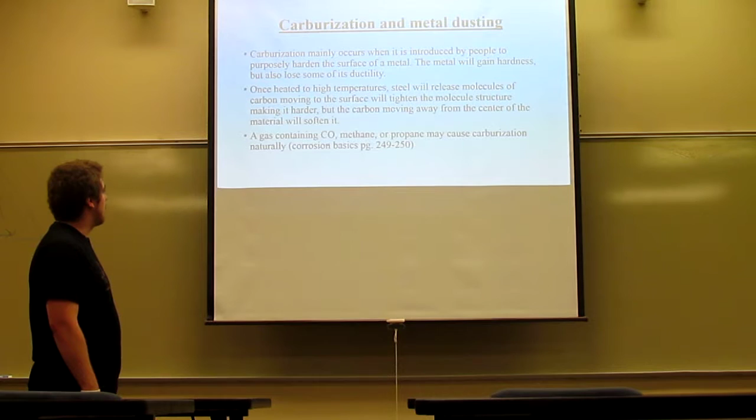Once heated, the steel releases molecules of carbon moving to the surface. Molecules that move to the surface will tighten the actual structure, making it harder, but obviously the more tensile strength that happens, it's going to break. Most metals are susceptible, but some more than others.

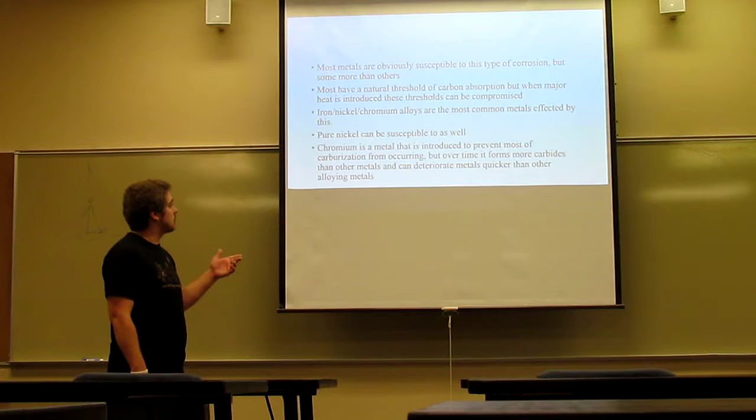So we have metal dusting. The gaseous state of graphite deposits on the surface of the metal, and that creates a graphitic layer. It can carburize in the absence of oxygen. Low alloys vary depending on this, but stronger alloys such as stainless steel can still deteriorate pretty fast.

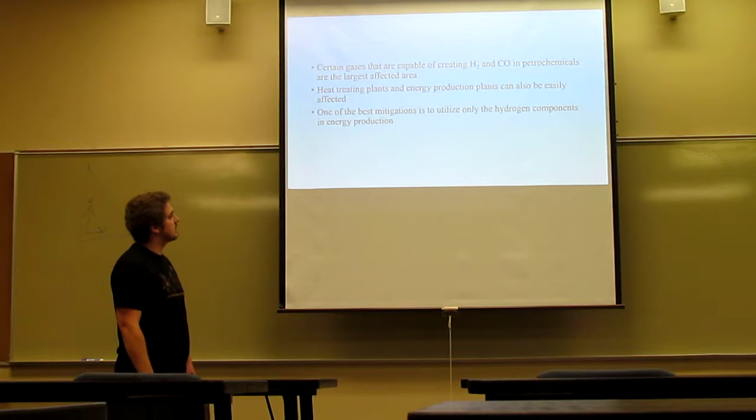The average temperature is about 450 to 800 degrees Celsius for the metal oxide to create pitting or localized corrosion. Certain gases that are capable of creating H2 and carbon monoxide in petrochemicals are the largest affected areas. Heat treating plants and energy production plants can also be affected, hence the high heat.

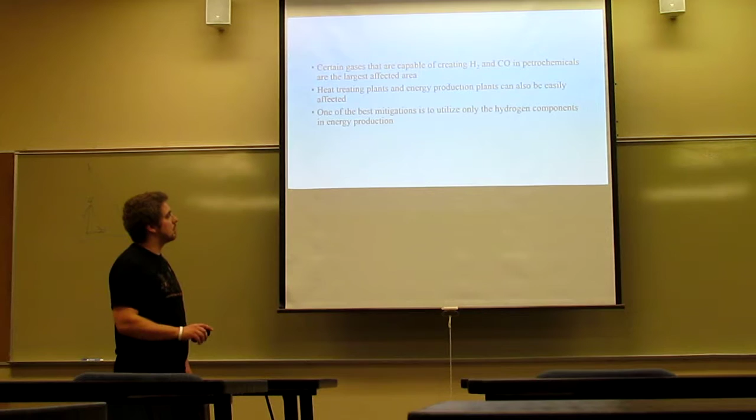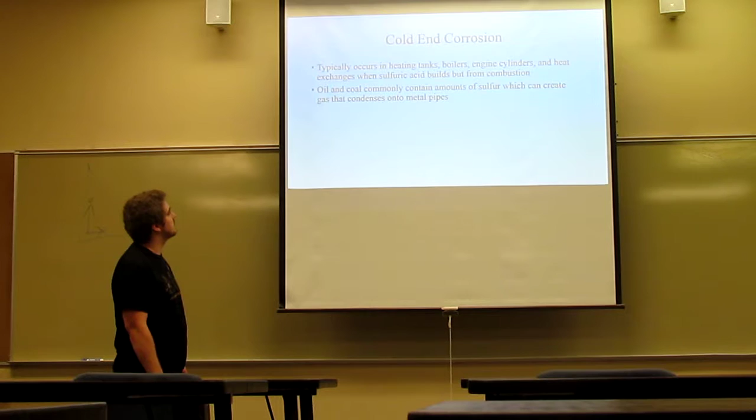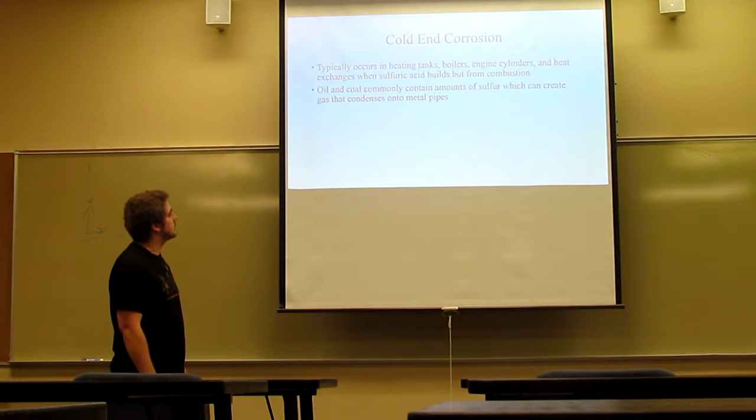My next topic is cold end corrosion. It typically occurs in heating tanks, boilers, engine cylinders, and heat exchangers, where sulfuric acid builds up from combustion. So obviously in gas. When everything is combusted, there's sulfur in the gas, and it ends up building up on surfaces. Oil and coal obviously contain amounts of sulfur.

Any metal that is used in engines and boilers is susceptible to it, so basically anything that runs on gas. Stainless steel is the main type that breaks down, but chromium, nickel, iron, and alloys including these materials will break down just as easily.

A few different types of cold end corrosion mitigation. Low sulfur fuels may be used if available. A lot of companies just don't use low sulfur fuels because it's a little more expensive. Adding magnesium oxide to the fuel may also help mitigate it, and it creates a magnesium sulfate, which is less corrosive.

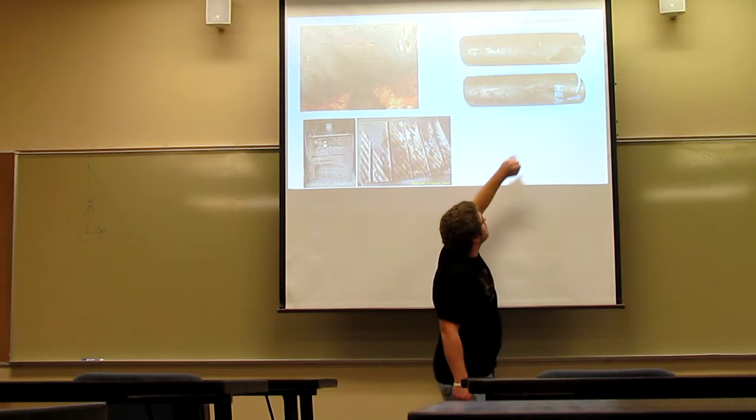Also, higher exit gas temperatures can help, but it's less efficient for the boilers or whatever they're using. So a lot of companies don't end up using that, but that is also a way. And as you can see here, you can see the buildup on the surface. It ends up eating straight away at it, and this picture over here shows that it's eating straight through everything.

Dry corrosion, very interesting type. It takes place without moisture, which usually doesn't happen. Dry corrosion is very slow because, as you know, for corrosion to happen, you need moisture and you need a metal. Obviously, when everything is heated, it's a little more susceptible. And sometimes people refer to it as chemical corrosion.

Typically, corrosion occurs when the metal is in contact with moisture. Gases such as oxygen and liquids come into contact with the surface. The most corrosive material is concentrated oxygen, and when that is not present, corrosion does slow. It's not as detrimental as wet corrosion. And the easiest way to solve this is just to add a coating.

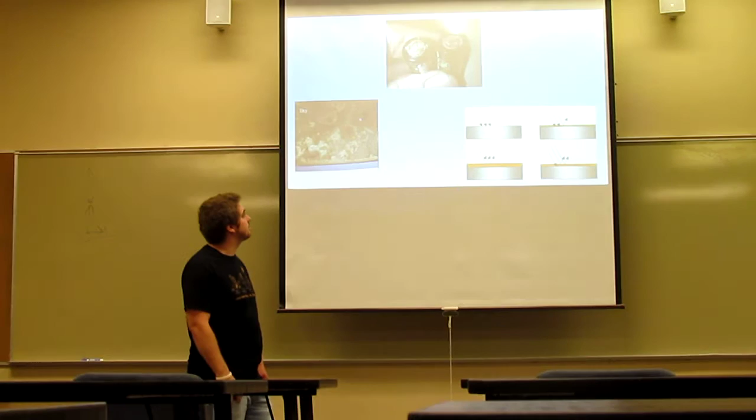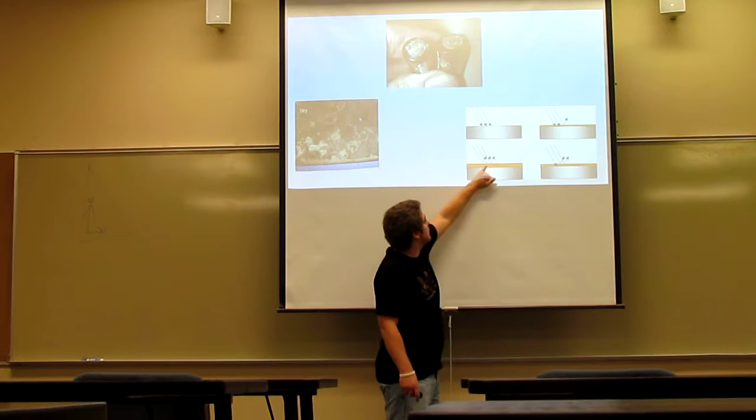And a few examples here. I like this one a lot, because you can see when there's no coating, it gets through. But when you have a coating here, corrosion happens a lot slower.

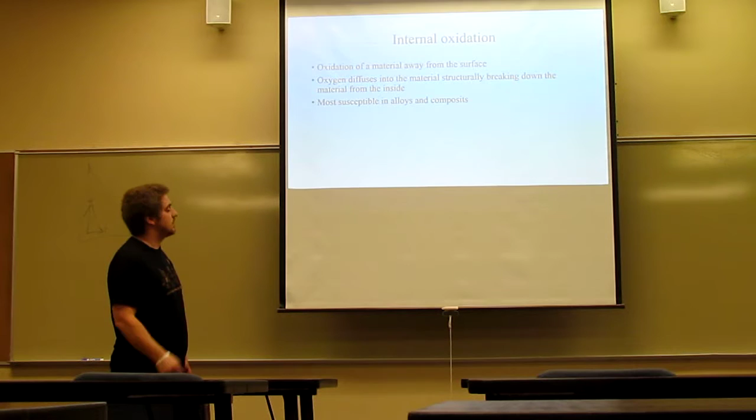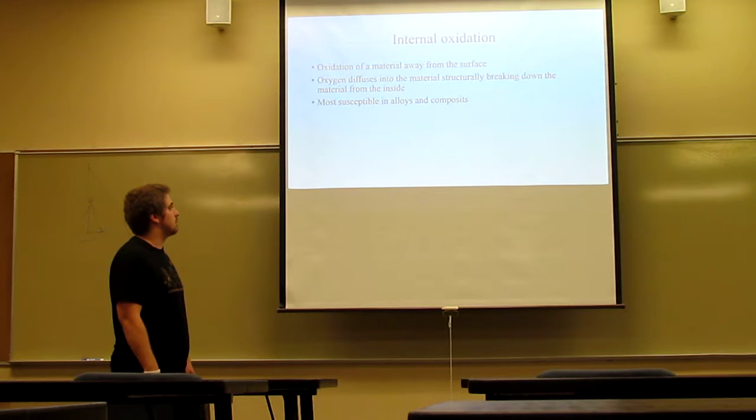Internal oxidation is oxidation of a material away from the surface. So basically, it's corrosion that happens inside of the material rather than on the surface. The oxygen diffuses into the material, and it breaks it down from the inside out. It's most susceptible in alloys and composites, really something that's combined.

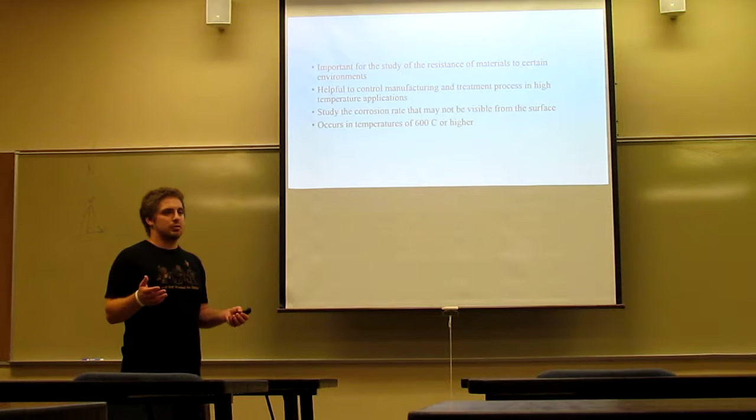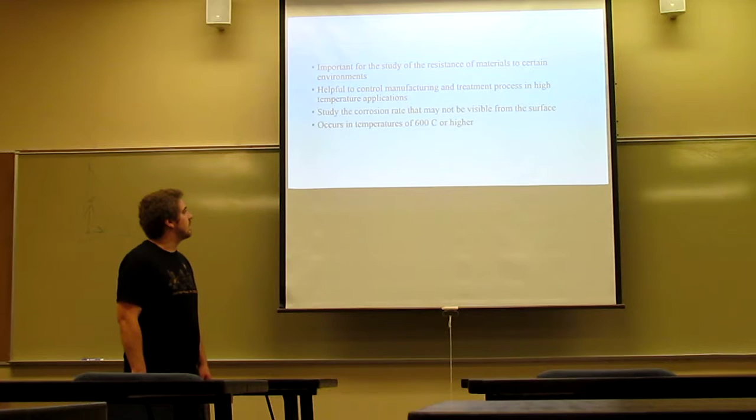And that's actually really important for testing materials. People will sometimes purposely do this just to test: we have this alloy and we need to see what kind of corrosion rate happens. So they will purposely put corrosion on it to see whether it builds up on the outside or slowly internally corrodes. The corrosion rate may not be visible from the surface, but that's really what they're testing for. And usually it occurs at temperatures of 600 degrees Celsius or higher.

Internal oxidation, if it occurs, can affect the tensile strength of the material, and it also creates fatigue over time. Testing and observing internal oxidation can be crucial to combine different materials to prevent corrosion of a finished product in a high heat or pressure area. So really they're testing the material to make sure that if it comes in contact with high heat or anything, it can stand up to what it's supposed to stand up to.

Prevention of internal corrosion can occur by combining particular metals together. Sometimes they'll alloy certain metals that pair well with each other to make sure that one can corrode faster than the other, so that it doesn't break down from the inside out. A few examples are that usually they combine silicon and copper, or chromium and nickel. This mitigates internal oxidation by the minor material being broken down quicker than the major material.

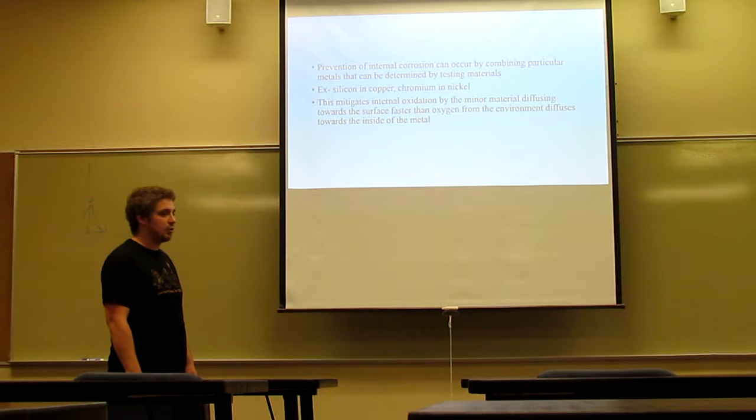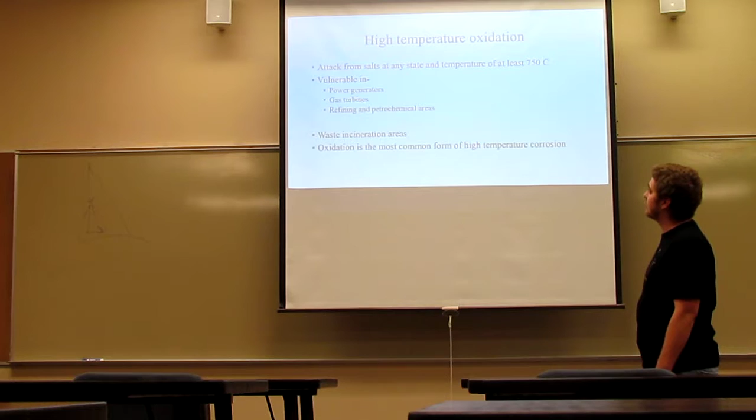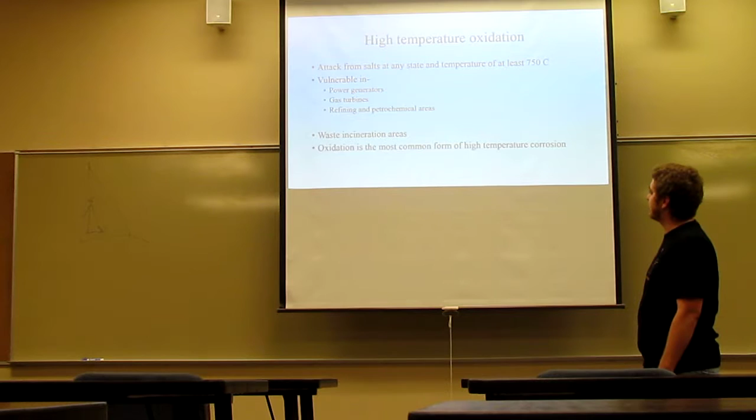High temperature oxidation is an attack from salts at any state and a temperature of at least 750 degrees Celsius. The main areas that are vulnerable are power generators, gas turbines, and refining and petrochemical areas. Waste incineration areas are also pretty susceptible to this. Oxidation is the most common form of high temperature corrosion, oxidation. When you have liquid metals, they become extremely susceptible to all of this, and when oxidized, the metals will break off and lose a lot of their material.

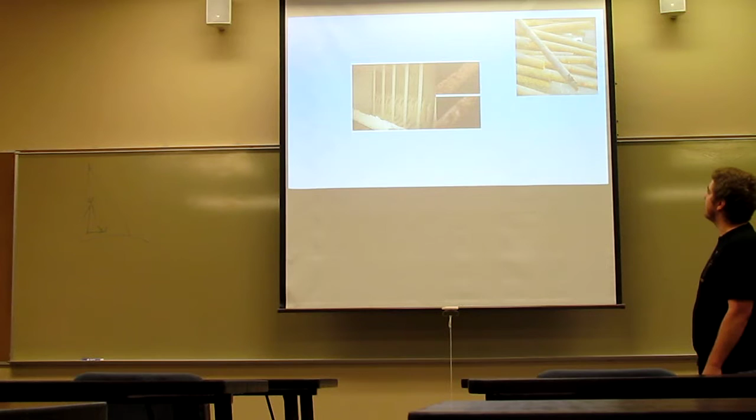And we have a few examples. As you can see on the top one there, everything broke down pretty quick and rusted away very fast.

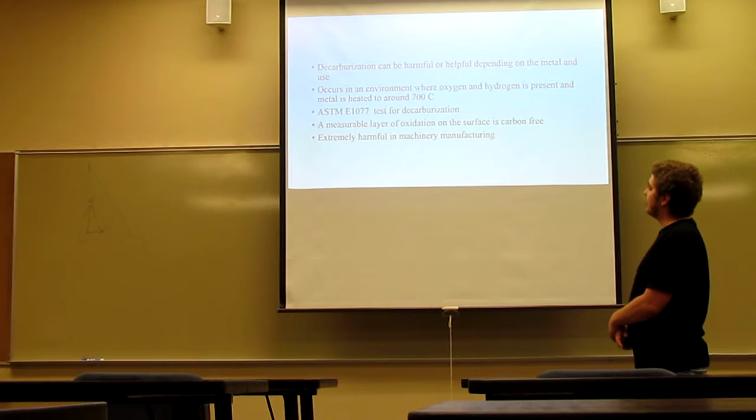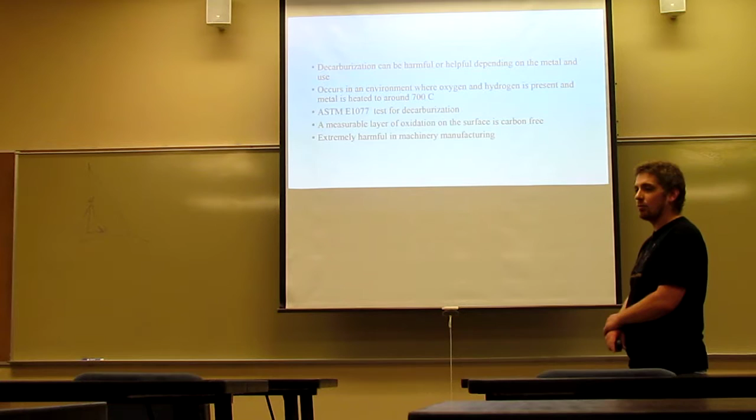Decarburization is the heating of a metal and the loss of carbon. This can deplete the metal's ductility and strength, and it also forms scale and forms cracks slowly over time. Decarburization can be harmful depending on the metal and the use, honestly. There's a lot of things that people do. They actually will put that in to test the strength of the metal. For some metals, they will actually do that depending on what the metal needs to do.

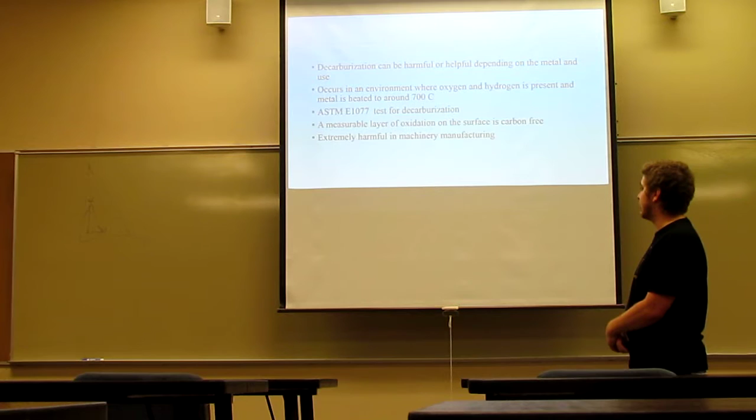It occurs in an environment where oxygen and hydrogen are present, which is almost everywhere, and the metal has to be heated to around 700 degrees Celsius. We have a standard here: ASTM E1077 is the test for decarburization. The test has three different types. The main type is that there is a measurable layer on the surface that is carbon-free. Type 2 is that 50% or more is carbon-free, and type 3 is 50% or less.

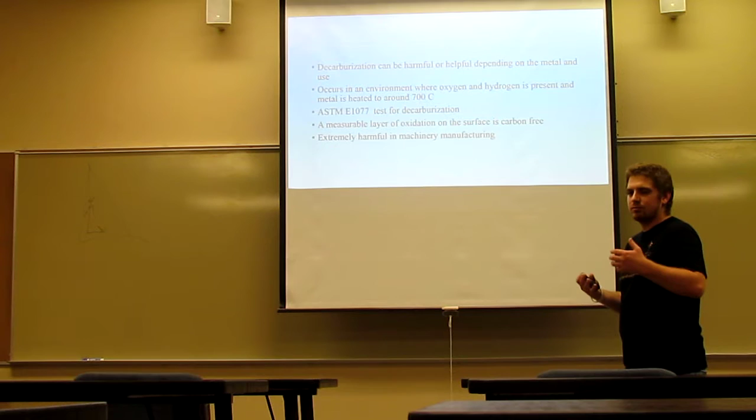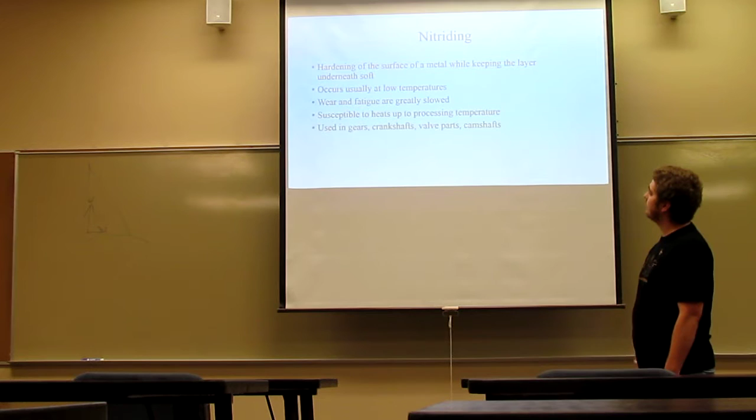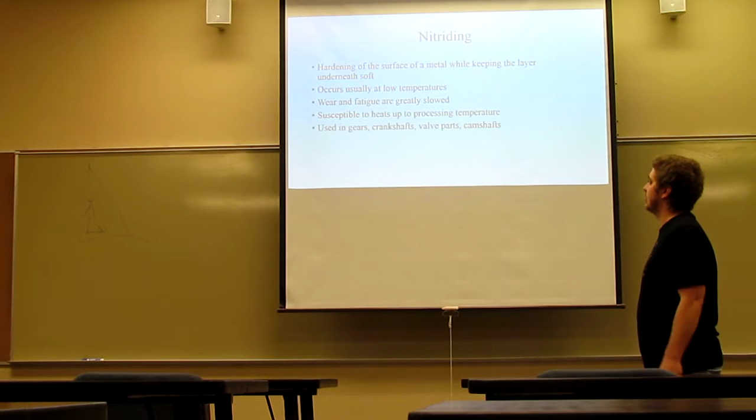Nitriding. Nitriding is the hardening of the surface of a metal while keeping the underlayers softer, and it usually occurs at a low temperature. Wear and fatigue are greatly slowed when you do this, but it is susceptible to heat when you get to that processing temperature of 700 degrees Celsius. It is mainly used in gears, crankshafts, valve parts, and camshafts. It's common in low carbon alloys, but also fairly common in titanium and aluminum.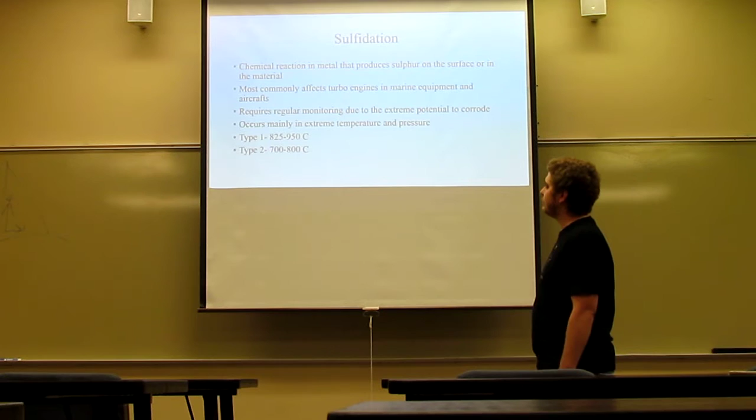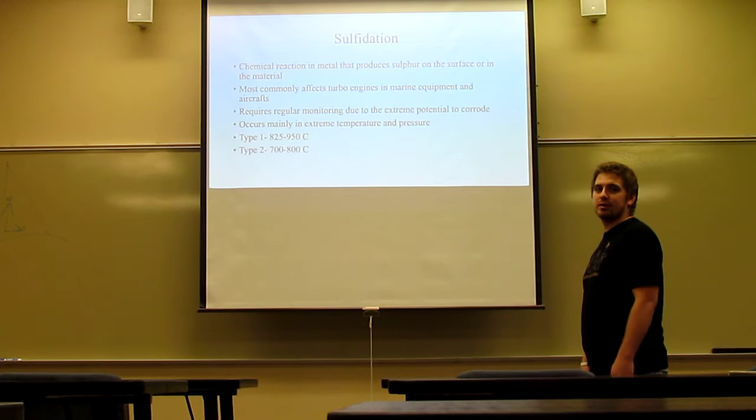Sulfidation is the chemical reaction in metal that produces sulfur on the surface or inside the material. It most commonly affects turbine engines, such as in planes, and some marine equipment as well, like subs. It really requires regular monitoring because as soon as it happens, it can break down equipment very quickly, so it is very detrimental. It occurs at extreme temperatures and pressures, hence why it's on marine and aviation equipment.

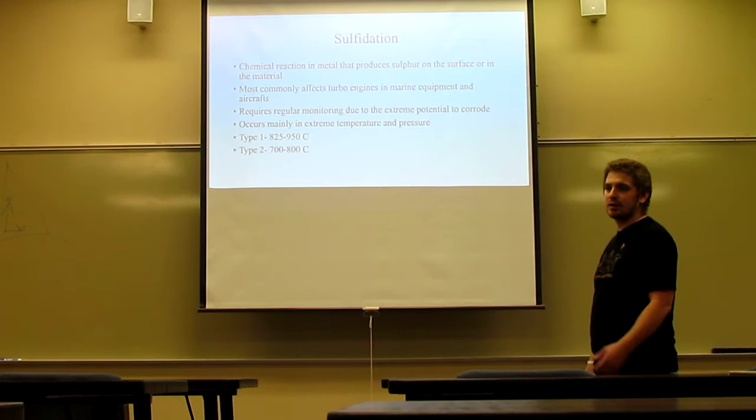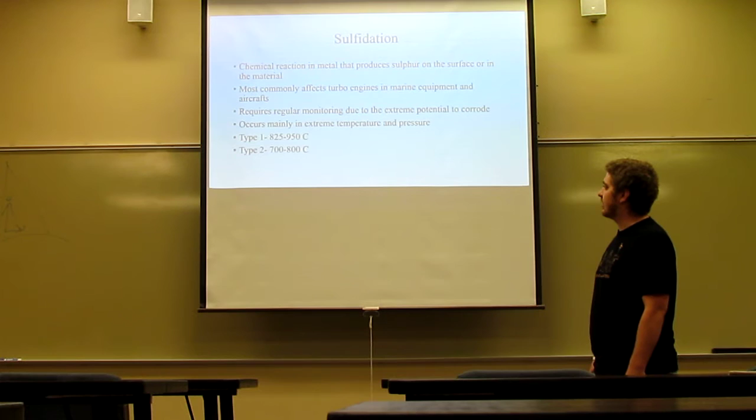There are two different types they consider. The first type, which is the worst, is at 825 to 950 degrees Celsius, and the second type is 700 to 800 degrees Celsius. It occurs in engines due to the fuel, due to combustion and the sulfur within the fuels. Usually plane fuels only contain 0.3 to 0.4% sulfur, but over time that does build up, and that will corrode very quickly.

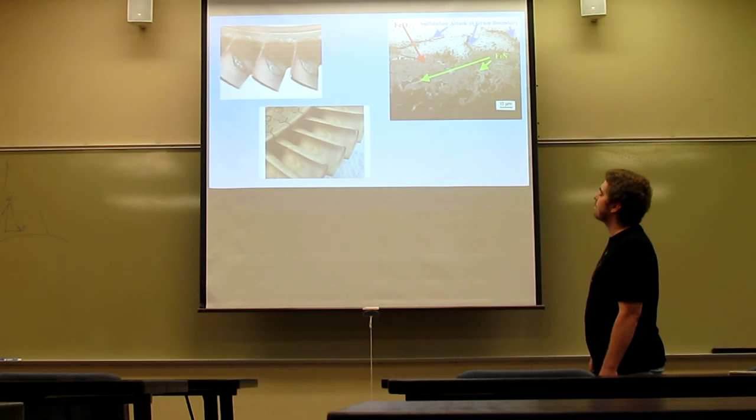It produces sulfuric acid that breaks down the coating, and the material if it's not coated at all. The way to prevent it is to alloy it with aluminum or tungsten, which can slow it down over time. I have a few pictures here. As you can see, right in the center there, that is starting to break down. That's a more detailed picture of what's going on there. And I have a few more.